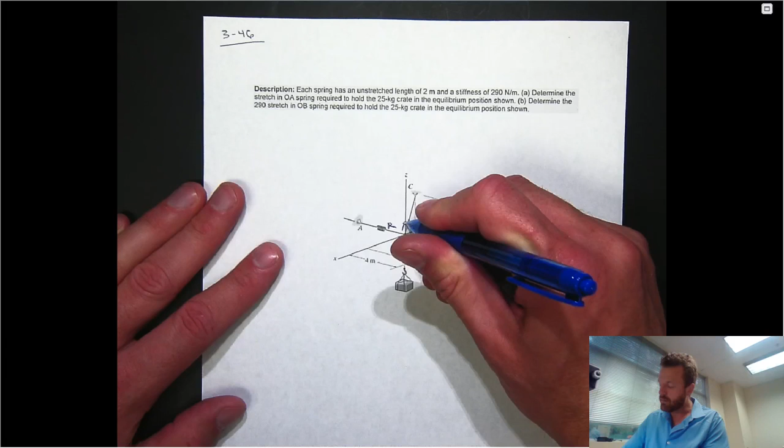In addition, the tension in this cable will serve to pull. Really what's going on here is it's this point of connection at the origin that's hard to see in the diagram as we have it printed. And those three forces are serving to offset the weight which is borne in the tension of this cable.

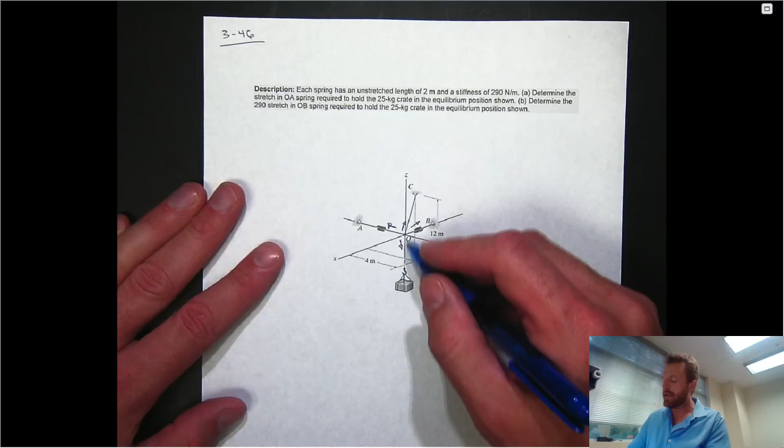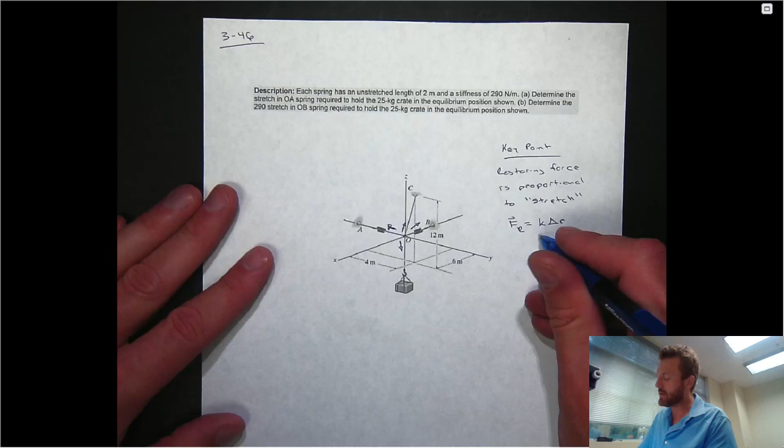So the key point that you need to know in order to be able to solve this problem is that for a spring, the restoring force is proportional to the displacement. And I will use the same term that the book does in this question, which is stretch. So this just means that we'll have a restoring force. It's going to be aligned along the direction of displacement, and it's going to be proportional to the amount of displacement, where this is the spring constant, which is just a measure of stiffness of the spring, or how much energy it stores for a unit of displacement.

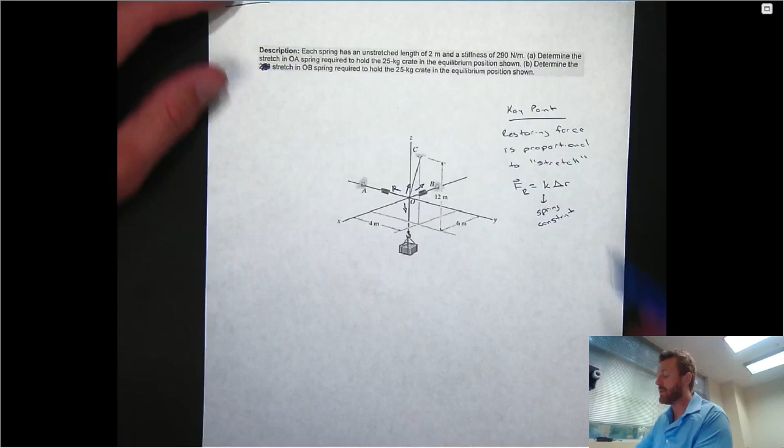So in this particular example, if you notice, what we're asked is the stretch of each of those springs. That shouldn't be in there; it's an artifact of printing. So in order to find the stretch of each of these springs, I just need to find the restoring force that is induced in each spring when the load is connected.

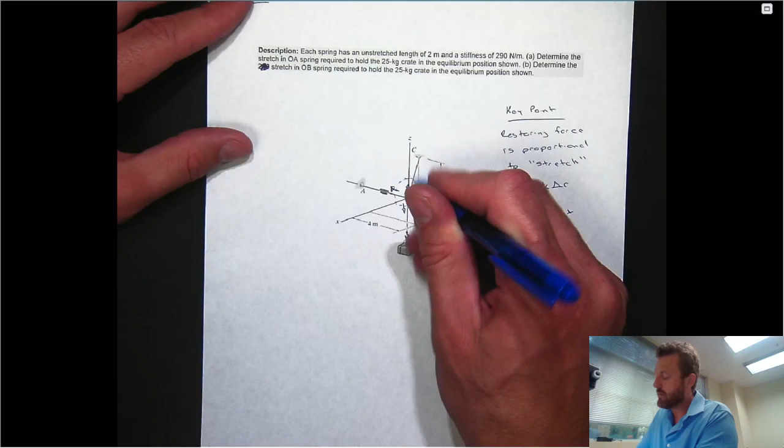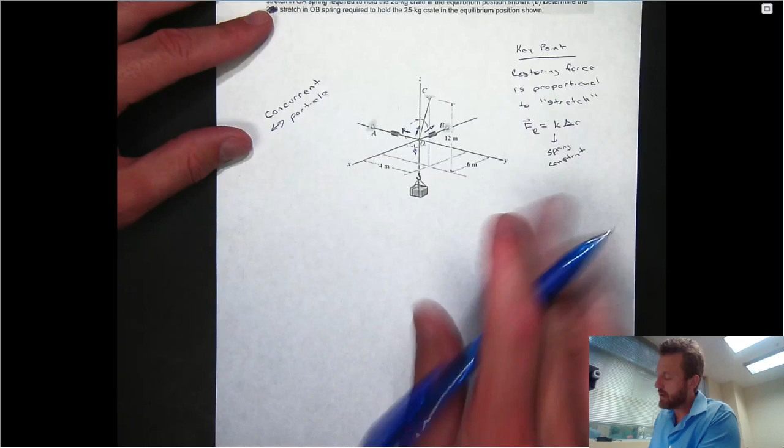So just like every problem we've worked until now, we're going to draw a free body diagram around the origin, which is this common point of connection at which each of the forces in this force system is concurrent, meaning its line of action passes through the origin. And just to reemphasize, as we move into chapter 4 for the last time, concurrent forces can be modeled as a particle system. So let's draw a free body diagram, taking some of the detail in that original drawing out. So we're modeling this point of connection as a particle.

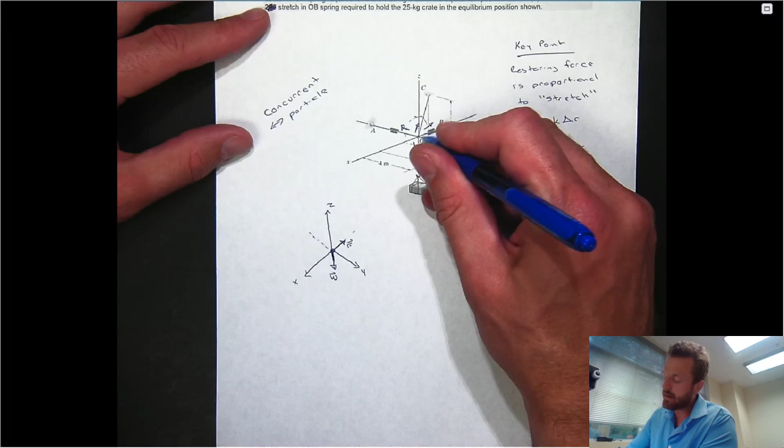I have the weight of the object, which is transmitted in that cable. It goes directly in the negative z-hat direction. In addition, if I extend out my axes in the negative direction, I have the restorative force associated with the spring connected from O to B. It's going to be directly along the negative x-axis because the restorative force always is opposite the direction of displacement. So when those stretch towards the origin, back along the axis of the spring, that will be in the negative x direction. So I'll call that FOB. I'll have FOA and a similar idea along the negative y axis.

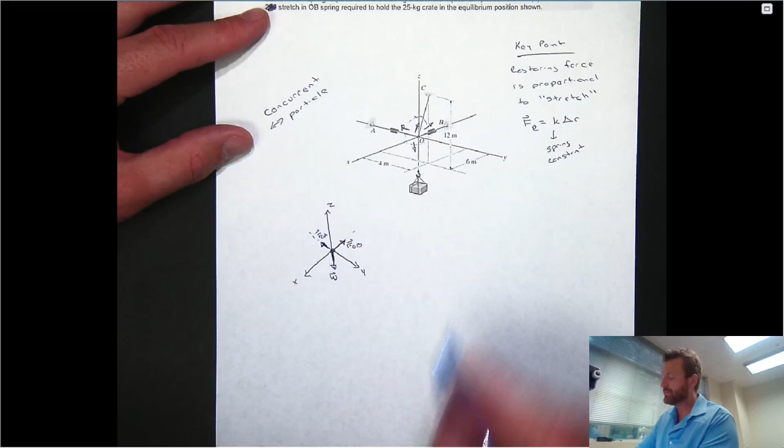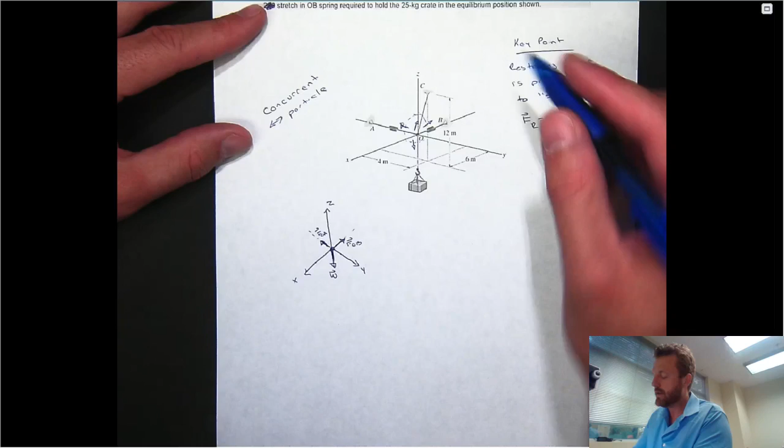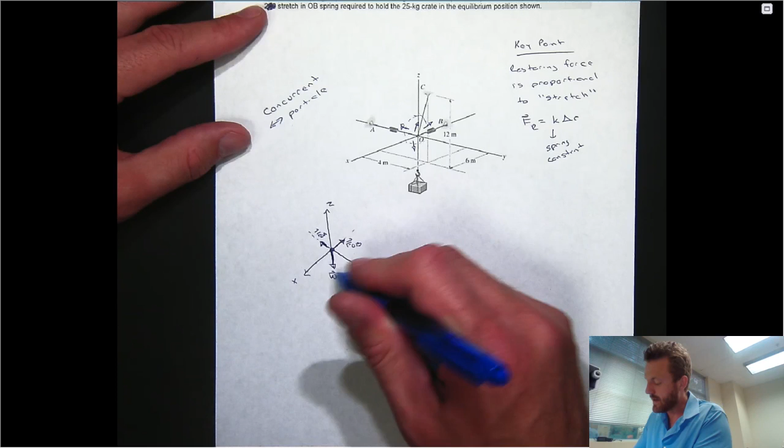And then finally, I can describe the tension in this cable, which serves to provide the vertical component to offset the weight. It's going to be directed along the cable, which is described by a unit vector from point O to C. The easiest way to sketch that out, if you really want to, is to just get a point of intersection in the xy plane corresponding to the dimensions. So if you notice, you're going to come out 4 in x and over 6 in y. So not quite as much over as out. So let's just say it's like right here, and then go up 12. So just to make the drawing look somewhat reasonable, I'm going to draw it like there.

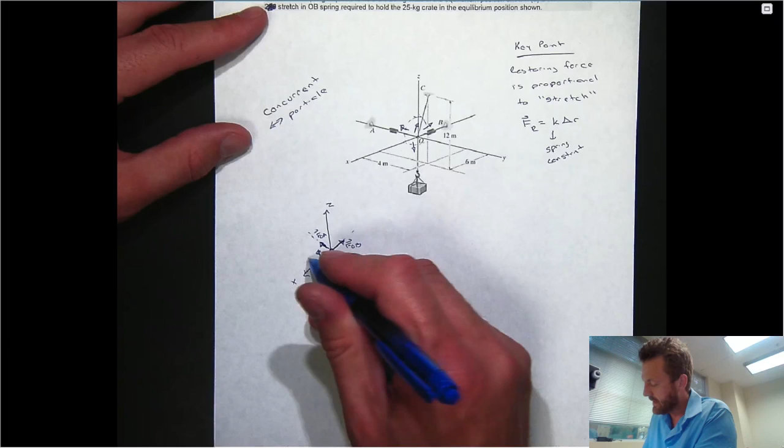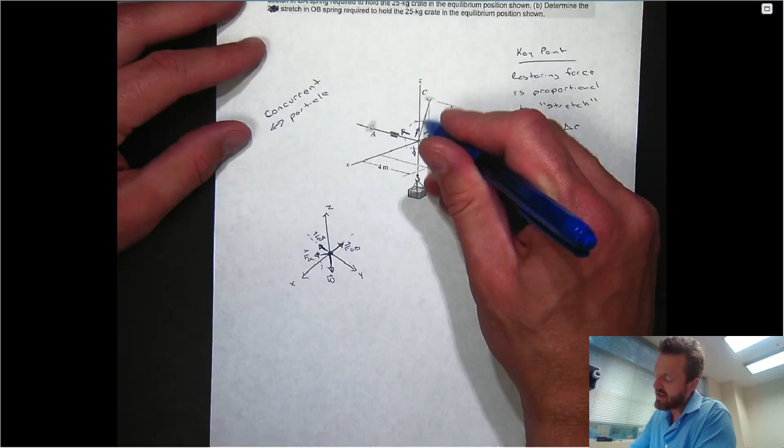So that's FOC. And that looks nothing like the actual free body diagram. And that's kind of good because it shows that for these particle problems, we don't need a very accurate free body diagram in order to solve them. But that should be directed along the axis of that cable. If we had graph paper, we could draw a nice version of it. So what do we need to do?

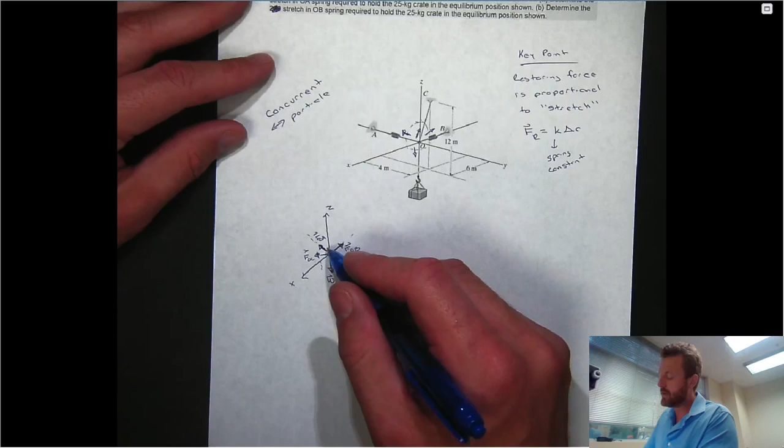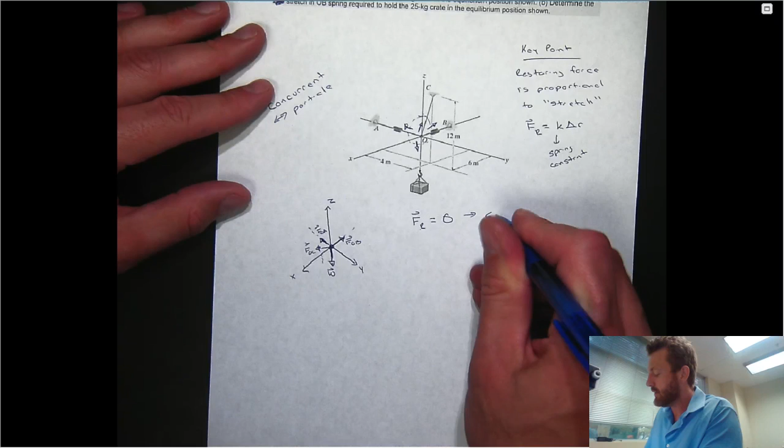Well, if we just find the magnitude of these two restorative forces, since we know the spring constants, we can compute the displacements. How will we solve them? Well, we'll find them by enforcing our condition of equilibrium in 3 dimensions, which says that the resultant force acting upon this body, if it's in equilibrium, is 0, which means that you have your 3 scalar conditions of equilibrium, which will allow you ideally to solve for 3 unknowns. So let's decompose each of these forces. Let's begin with the weight. It's an easy one.

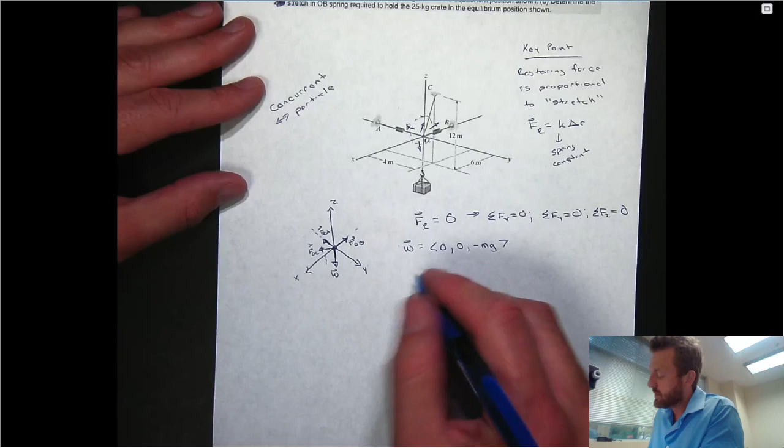As long as we choose our z-axis to be perpendicular to the Earth, then all weights will have no x or y component, and they will have the magnitude of weight in the negative z direction, which for a known mass you compute by multiplying by the acceleration due to gravity. Let's do the two restoring forces of the spring.

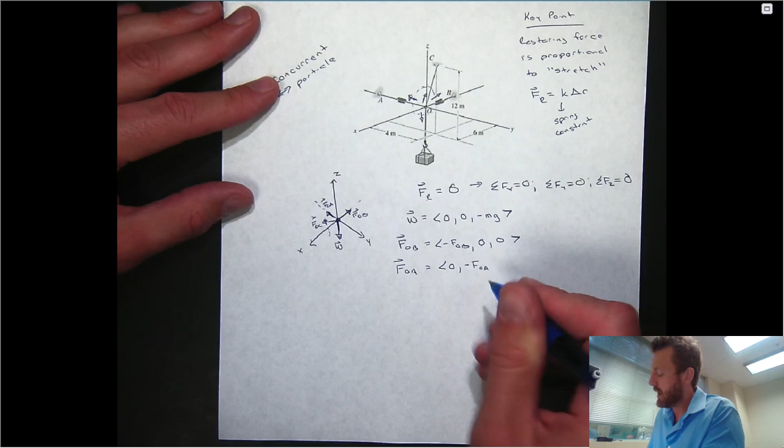Let's start with FOB. If you notice, that's directed along the negative x-axis. That is a magnitude that we don't know. However, we do know, since the axis of the spring is along the negative x-axis, that the y and z components of that restoring force will be 0. In a similar idea, FOA has no x component. It has a y component of whatever that unknown restoring force magnitude is. Again, by our coordinate system, since this is plus and this is plus, that's in the negative y direction.

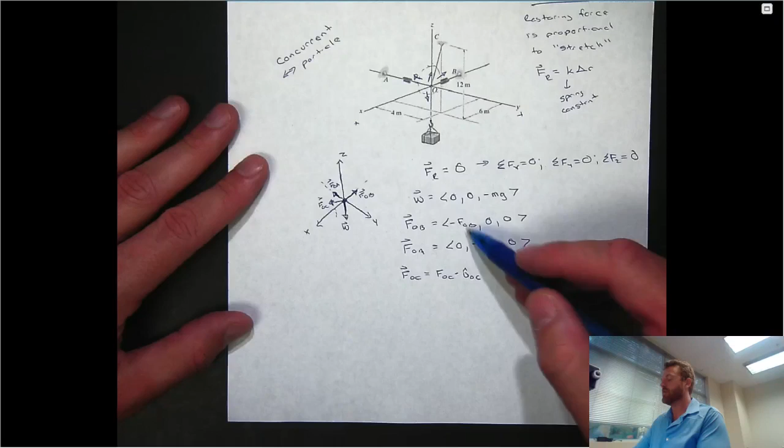So z is 0. And then the force associated with the tension in that cable is going to be a little more complicated because we don't know the magnitude, but we can compute the direction, but it's not going to be as easy as just assigning it to one of the three axes because it's off axis. It's directed along the cable. So what I need to do is first determine the coordinate location of C. In order to get there, again, follow the dimensions as a guide. You'll notice we go to this point in the XY plane, and then we go up.

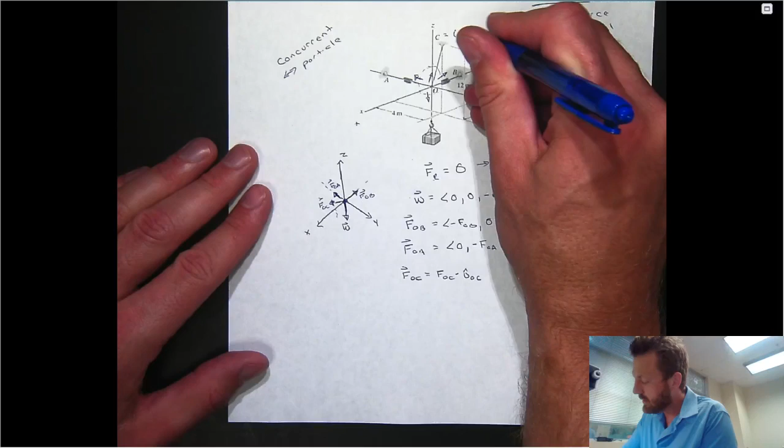So the question is, how do you get this point in the XY plane? Well, it's positive 6 out in X. It is positive 4 out in Y. And from that point in the XY plane, it's up 12 in Z. So remember that I can always write an expression for a position vector between 2 points. From the origin to C in this case is taking the coordinates of C and subtracting away the coordinates of O. But since O is the origin, that's going to be easy. The corresponding position vector will just be the coordinates of C.

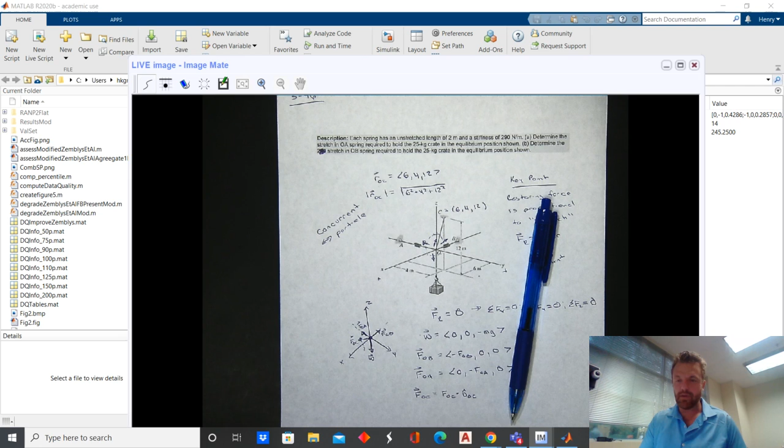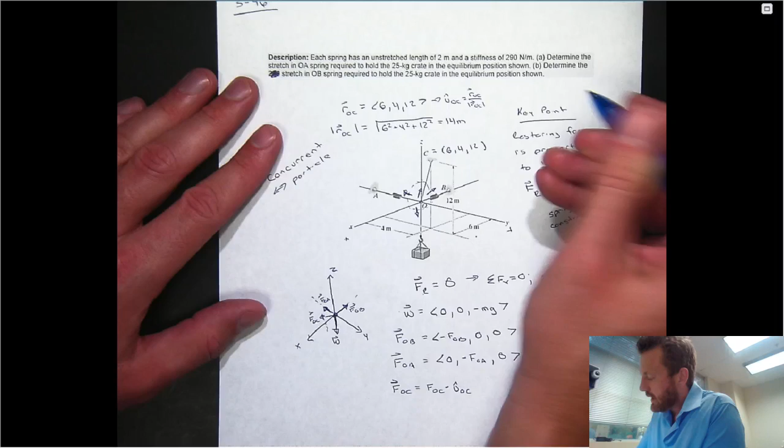And I can compute the magnitude of ROC by simply taking the square root of the sum of the squares of each component. So we can compute that in a calculator. Square root of 36, I'll do the squares. And I get 14. 14 what? Well, since all of those dimensions that were provided are in meters, that will be 14 meters. So if I scale my position vector by that magnitude, I will get 6 divided by 14, just cancel the common factor of 2. You'll get 3/7, 2/7, and 6/7.

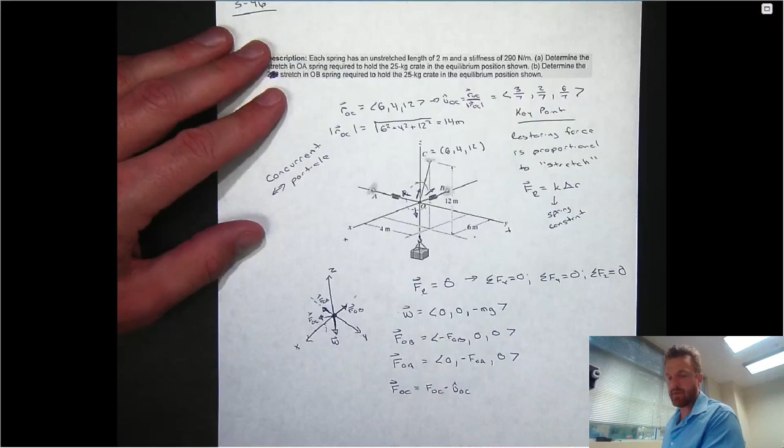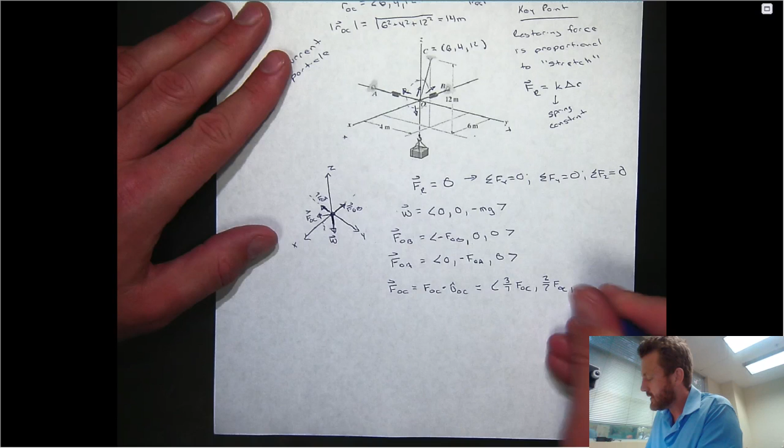So coming down here, I can express FOC in rectangular form by just calling it 3/7 whatever that unknown magnitude is, 2/7 whatever that unknown magnitude is, and 6/7 whatever that unknown magnitude is. So in enforcing equilibrium, for my three scalar equations, if the sum of all forces in the x direction is 0, and we're using the convention that that's positive x, the same axis that we've drawn, just take all of your x components and add them up.

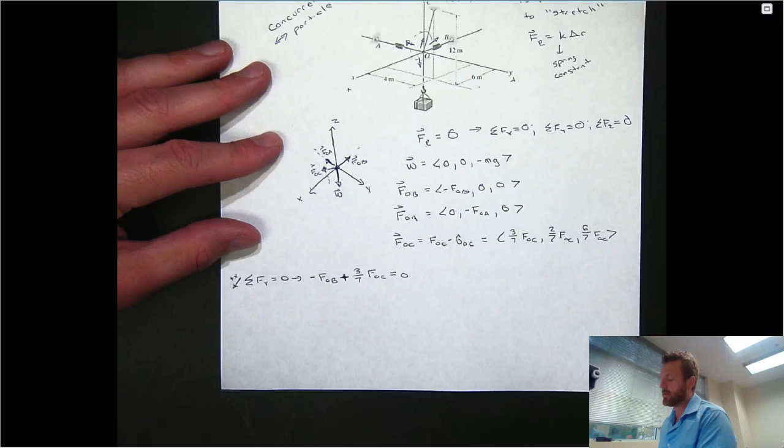So it's going to be, and I'll just skip the zeros for now, minus FOB, sorry, I should say plus 3/7 FOC, getting ahead of myself, equals 0. So just check that we get all the x's: no x, minus FOB, no x, 3/7 FOC. So I have a highly decoupled equation in terms of my unknowns. Remember, your three unknowns here are basically the two magnitudes of the restoring forces and the tension in that cable, because we know that the tension in this cable is just the weight.

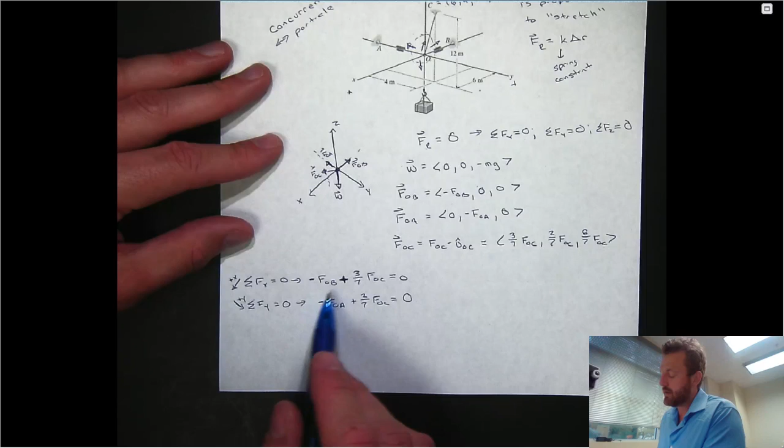So sum of all forces in y. That's what we're calling the positive. And if that is 0, again, going along our y components, we will find that minus FOA plus 2/7 FOC equals 0. So again, if we just knew FOC, we could solve for both FOB and FOA. And summing all forces in the z direction and calling that positive, we will find that minus mg plus 6/7 FOC equals 0. And that's not surprising.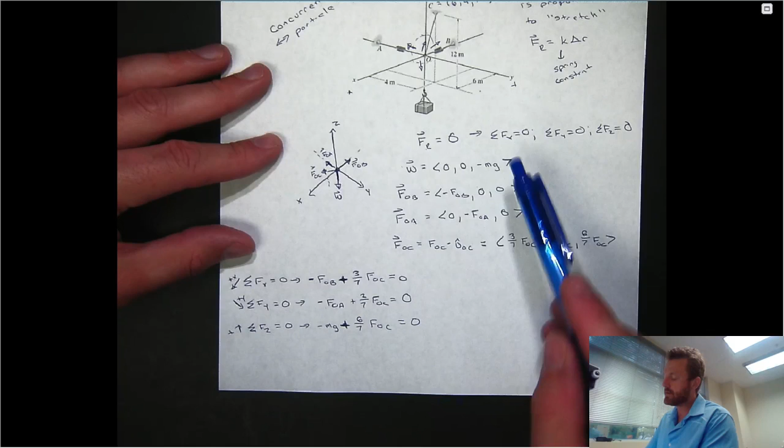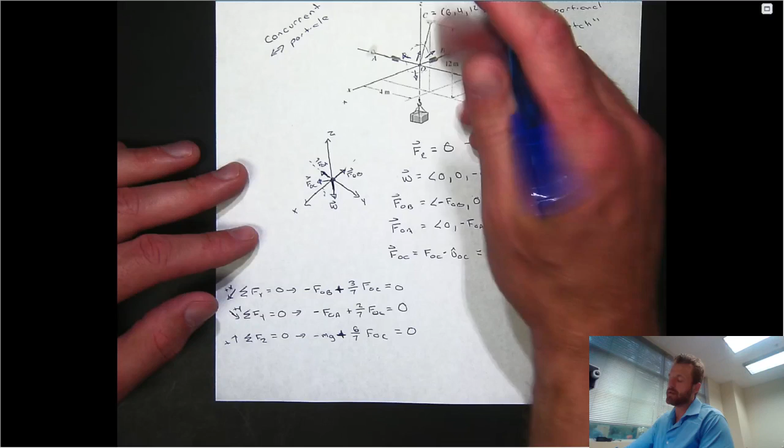Sorry, I keep doing that. I want to write the whole equation first before I simplify to that point. The sum of all z components: minus mg, 0, 0, and 6/7 FOC equals 0. Now, we knew that this cable from the origin to C was the only support structure capable of providing a vertical component of force to offset the weight of that crate. So I can find FOC by taking mg and just multiplying by 7/6. That's the same thing as dividing by 6/7.

So what will that be? Well, the mass was 25 and the acceleration due to gravity is 9.81, times 7 divided by 6. I'm going to get 286.125, and I'll hold all the precision for now, and that is in newtons. So therefore, I can find FOA as just 2/7 FOC. Let me get all this written down. So I'll take that answer and multiply by 2/7. Then I get 81.75 newtons.

And FOB is just going to be 3/7 FOC, which is just going to be, let me go back and get that, 122.625.

And again, I'm carrying all the precision because I ultimately want the displacements. So let's actually do that. Remember, the displacements are only associated with the spring forces, which are FOA and FOB.

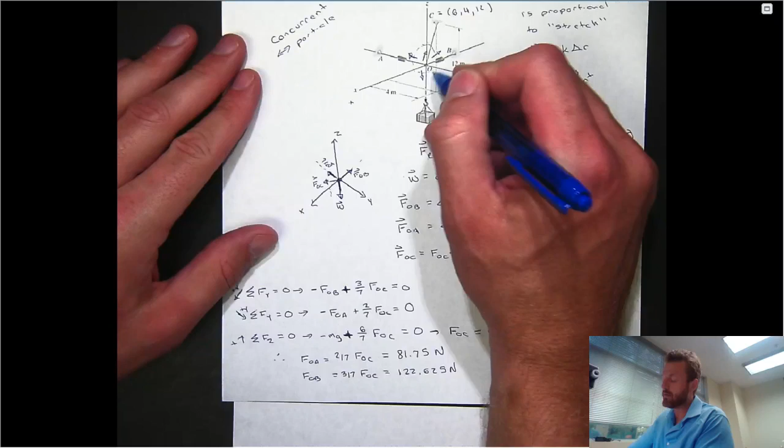We weren't asked this, but if you wanted to determine the actual direction of the displacement, when the spring is stretched in order to generate that restorative force, they're going to stretch towards the origin. So that's in both the positive y direction for OA and the positive x direction for OB. So we can just write them as delta y and delta x, and it turns out that it's a physically meaningful thing.

So to get the displacements here, I would say that FOA equals KA times, and A is the one that's in the y direction, right? So that would be delta y, which means that delta y will just be FOA divided by KA. And let's get both before we go to the calculator. FOB is going to be KB times delta x, which means that delta x equals FOB divided by KB.

So FOA we had is 81.75 newtons, and we're going to divide by the spring constants. We were given 290 newtons per meter. So the newtons will cancel. We'll get 1 over 1 over meters, which is just meters, as we expect. 122.625 newtons divided by 290 newtons per meter. So let's actually compute what these are now.

So for the first, we can see we're going to have to put these in engineering notation because they're going to be less than 1. If we take that 81.75 and divide by 290, that's the natural answer in meters, but converting that to millimeters, I'm going to just write what the answer is, and I'll tell you how I got it in a minute. 282 millimeters, and where are we at? 122.625. That is going to be to 3 sig figs, 423 millimeters.

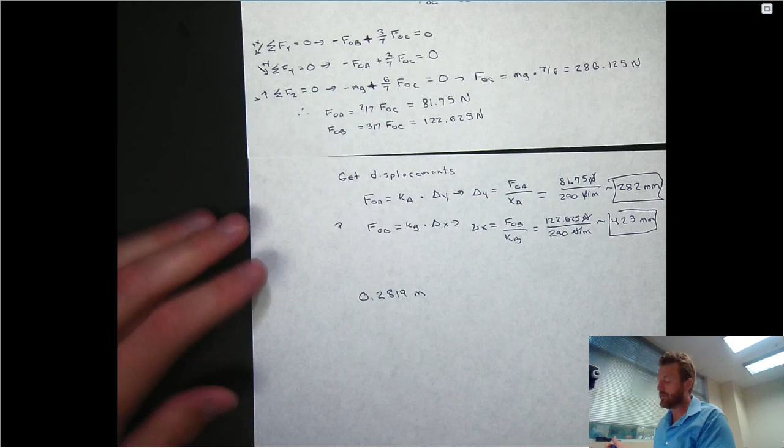Okay, so if you don't remember how to do that conversion, it's just a refresher, but if I had 0.2819 meters, and I want to take that to millimeters, you can do the dimensional analysis approach, but what I like to say is, okay, I want to have a millimeter. And if I want that, that really means multiplying by 10 to the minus third. But I can't just multiply by 10 to the minus third. I can only multiply by 1 and not change the value. So I would also have to divide this quantity by 10 to the minus third.

So I make the prefix that I need, I leave that alone, and I take the adjustment and roll that into the coefficient. So this becomes 0.289 divided by 10 to the negative third times 10 to the negative third meters. This is unchanged because really I'm just multiplying by 1, 10 to the minus third over 10 to the minus third. So when you divide by 10 to the minus third, that's really multiplying by 10 to the third, which is just 1,000.

So that's why this decimal just gets shifted over 3 points, and you get 289, and then rewrite 10 to the minus third as just the prefix millimeter. So that's how I was doing that conversion, but I lost a 1 in there, so that's 281.9 millimeters, which is about 282 millimeters. Since I'm going to scan this, I'll write that in. This is how to convert.